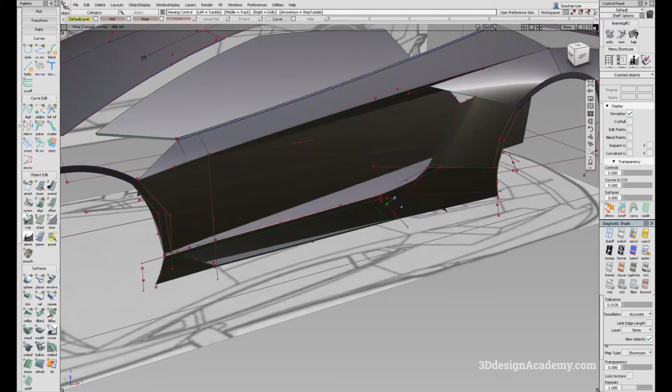In this lesson, we will continue with part 8 of the Lamborghini Aventador project. In the previous lesson, we spent some time working on the door, and we discovered a problem, and that is this highlight over here. This is supposed to appear as just one panel, but because of this little flick in the highlight, I think it's going to cause a lot of problems.

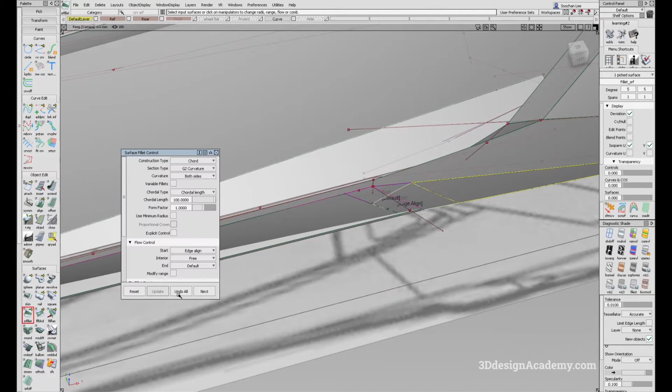First of all, let me just undo this, because this is no longer valid. Let me just delete this one as well, delete the surface over here. Since it looks like this surface is supposed to be just one straight surface, here's what I'm going to do.

I am going to connect the curve. I'm just going to make this a degree 2. I'm going to connect the curve over here like this. Actually, let me copy and paste this one over here.

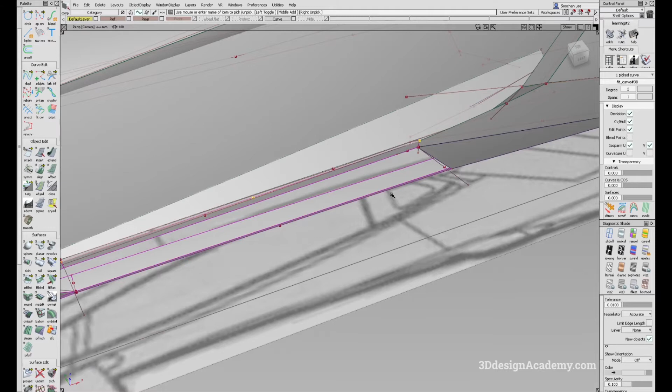So what I'm going to do is copy and paste like this, and extend this curve. The one I copied and pasted is 43, so I'm just going to snap it over here, somewhere over here, and snap this one over here like this.

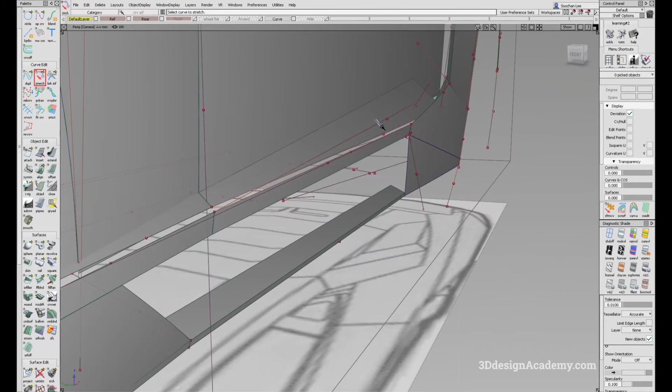The reason why I'm doing this is because right now all the surface has a little bit of crown, so I'm trying to keep that crown, or similar gesture of crown, on the surface as well. Okay, I think that's good.

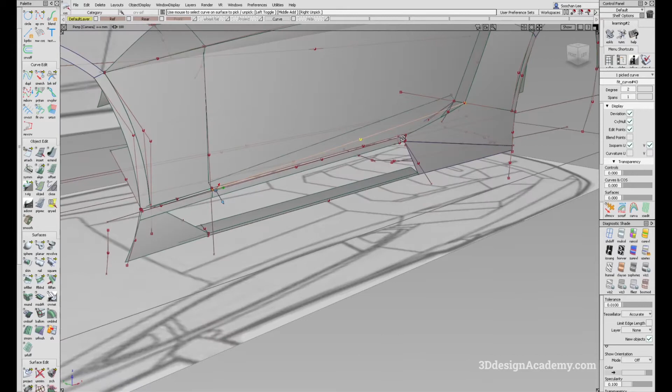The second thing I'm going to do is create a bi-rail based on the surface. Actually, before I do that, I do think that this has a little bit too much

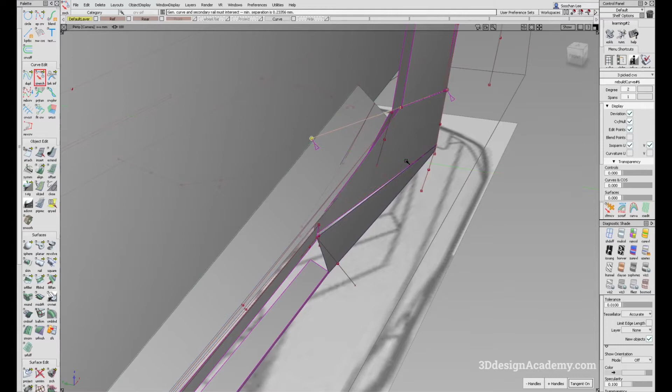twist on the surface. So let me just bring this a little bit more inboard. This is also going to depend on how much - well, I need to pull this out. So let me just pull this in so that there's not too much of a twist over here.

What I'm going to do is realign this curve like this. I'm just going to snap it over here. I don't think it snapped on the right place - no, I don't think it did.

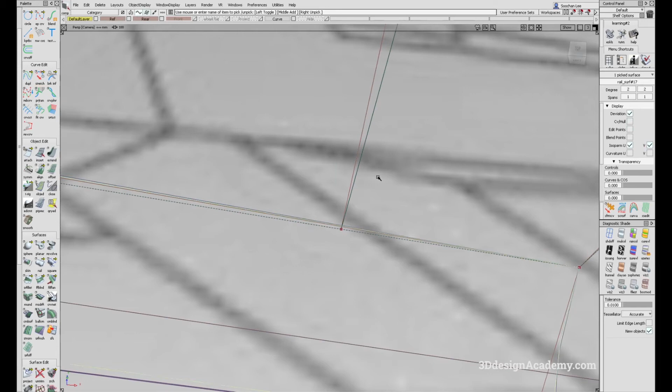So I'm just going to grab this surface, grab this curve. Actually, let me just make sure the draw precision is high. I'm just going to grab this curve over here like that and go to the side view, and just re-snap it like this. That should have fixed the surfaces.

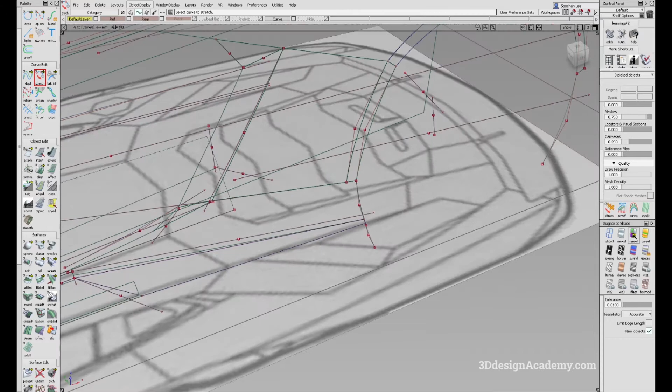Okay, so I think everything looks good. There's a little bit less twist there.

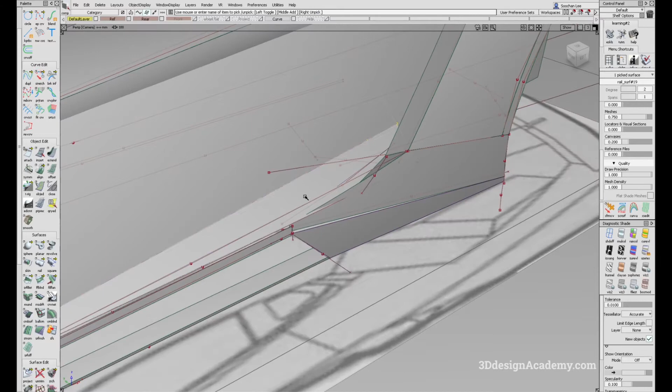What I'm going to do is realign this curve over here to this one right here. Okay, I think that's good, and I'm just going to create a bi-rail based on the surface.

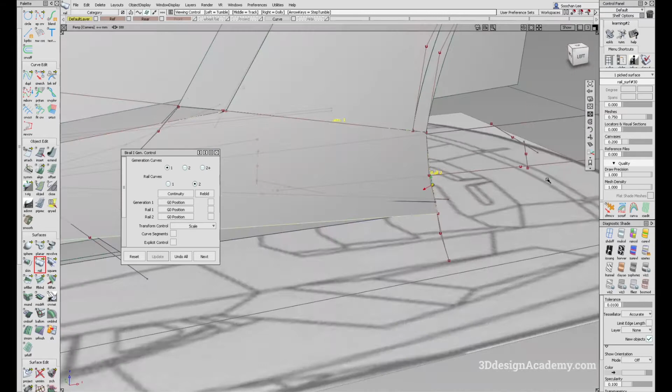Because I pushed this in, this probably also has to be pushed in, but that's okay, I'll do that a little bit later. So I'm just going to do a bi-rail. This is going to be the generation curve, this is rail 1, and the edge we already have is rail 2. Let me check the highlight to make sure it's reasonable. I think it looks good.

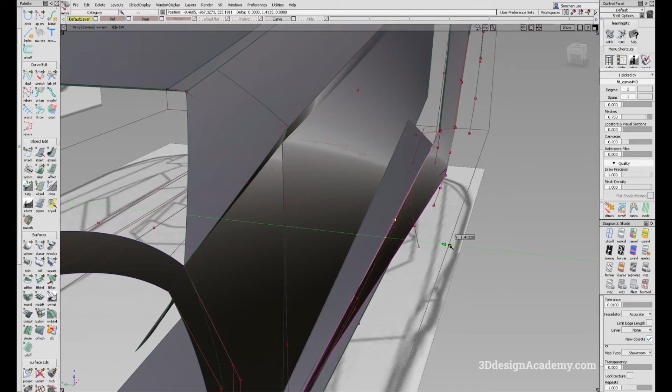There's a little bit of twist over here. I think there might be too much volume there, so I might have to make this a little bit flat. I'm just going to reduce the volume on this a little bit — I think that's causing a problem, making the surface funny over here. Okay, I think that's a little bit better.

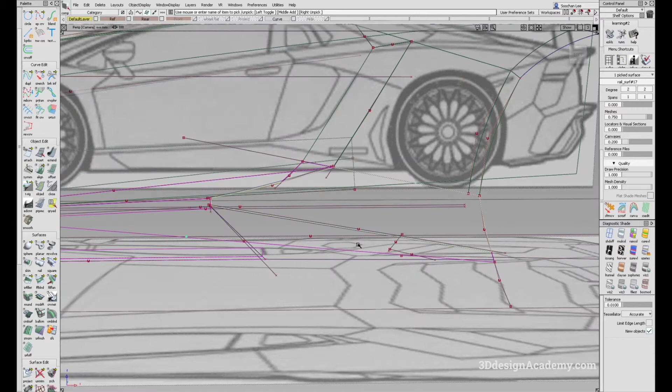There's a surface behind this one, so I'm just going to hide it for a second. Okay, I'm just going to delete this one — that is no longer needed.

I'm just going to look at the surface structure. Highlight looks pretty good, there's a little bit of flick here but I think it's reasonable, and overall the highlight is looking pretty good. Okay, so I'm pretty happy with that.

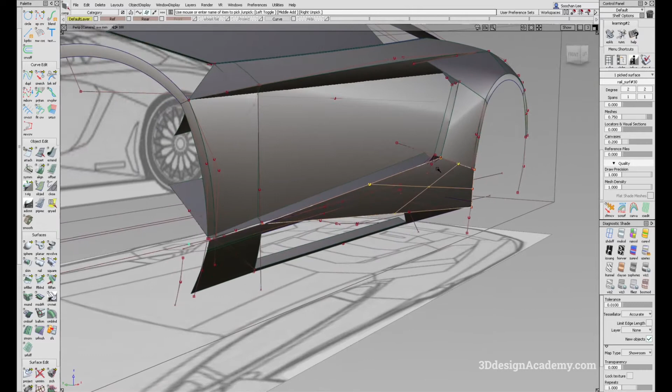So now let's go ahead and trim this surface out. What I'm going to do is grab this edge, and also grab this edge, and let's just trim it out.

Oh, actually, before I trim it out, I do need to extend it down. So I'm just going to extend the surface like this, and I think that's good.

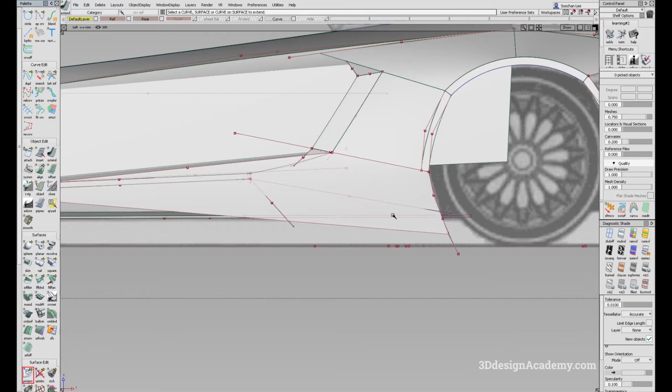Let's also project this bottom line over here like that so we can trim everything. Now we also need to trim this one because it actually needs to connect. Let's see — actually, you know what, I'm just going to trim it using this for now.

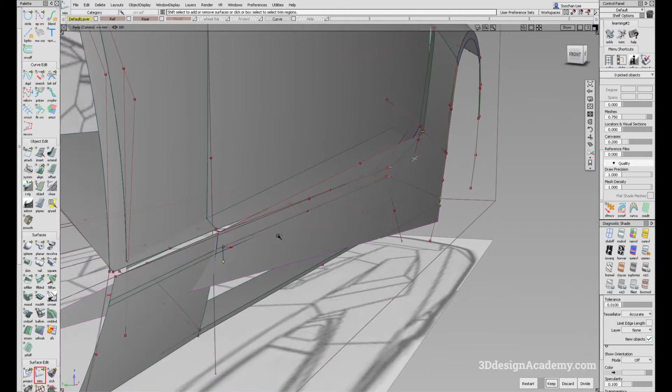Okay, I think that's good enough, let's just trim. Okay, looks like it's not trimming. Oh, we need another projection curve over here. So I'm just going to project that one like this, and here it is.

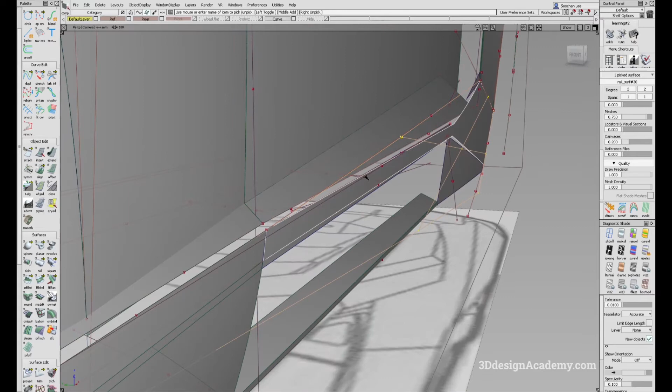Okay, overall I don't think it's too bad. This one needs to actually pop out a little bit, and I probably need to adjust it too, because I made this a little bit flat due to the highlight — I probably need to make a little adjustment.

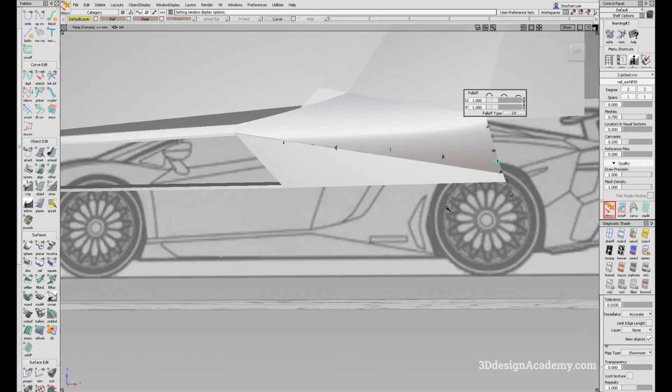But before I do that, I think I'm going to increase the amount of volume on this piece over here. I think it might be too flat, and that's one of the reasons it's causing a little bit of a highlight issue over here. I think that's good.

Let's just take a look — the crease is still there. I think that looks pretty good. Okay, so overall it's not too bad. Now this one I'm going to fix a little bit later, that's the last of my worries.

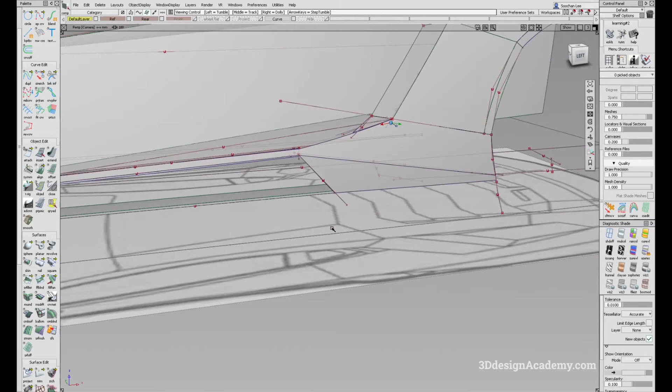So let's go ahead and work on this one. Okay, so this area, actually, this is one of the more critical areas that we need to be aware of.

Now, if you look at the image over here, let me just pull this out — you'll see that everything is just one surface, and you'll start to see a little break over here. So what I'm going to do is create a curve from here to here to trim this out, and I'm going to twist the surface inward so we can get this nice gesture in here.

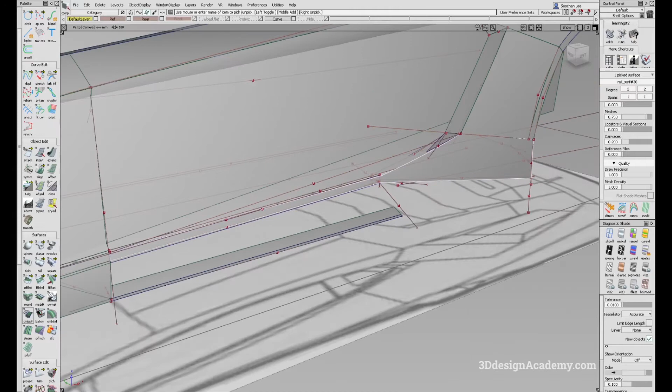So I'm just going to untrim this curve, this surface over here. And this, I believe, was the original location where we need this to intersect. So I'm just going to project this curve over here, and this is where the surface is going to transition inboard.

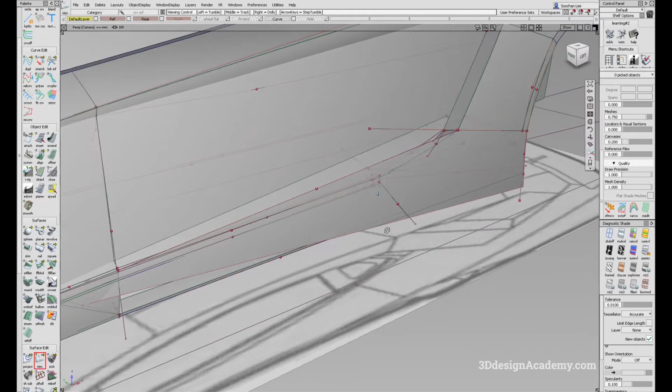Okay, I'm just going to trim this one like this. I think that looks good. Now let's see if it's going to work over here.

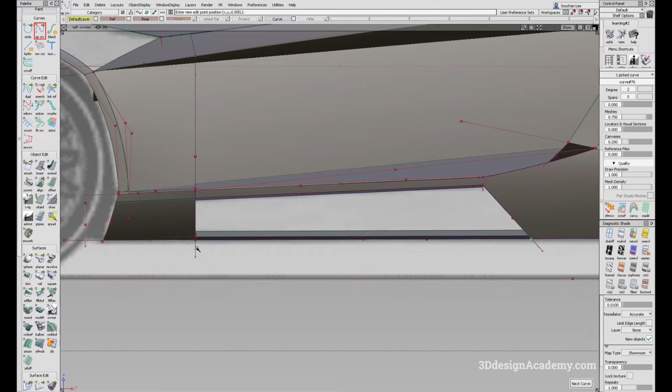So what I'm going to do is just grab a degree 2 curve like this — oh, not a degree 2, a degree 3 curve like this. I'm just going to snap over here, and what I'm going to do is make this into a degree 3.

And because this has to be a nicer transition, it has to be a curvature transition, I'm just going to align this curve over here, and I'm also going to twist this one inward like this.

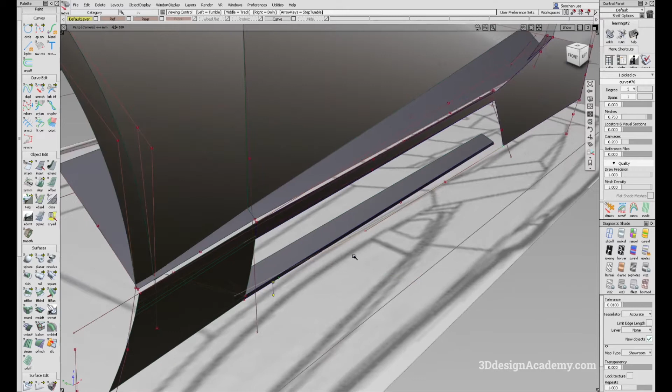So now I'm just going to do a bi-rail. I'm going to pick this one as a gen, this one as a rail, and this one is a rail too. Looks like it's not building, so I'm just going to do a rebuild over here. It's got a lot of spans, but that's okay. I'm more interested in the shape.

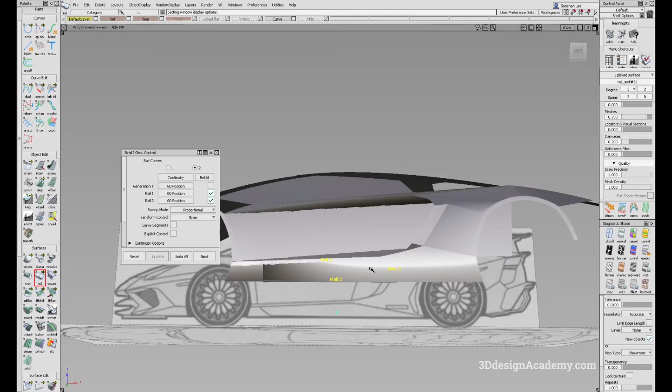Okay, so because of the twist, you'll see the highlights going straight and it's lifting up, but that's okay. And if you see this image over here, I think this is also doing the same thing. So I think this is actually pretty good.

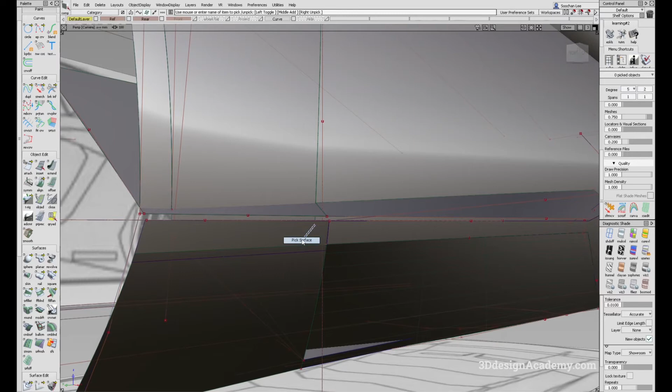And because of the division over here, what is this surface? Oh, this we no longer need, so I'm just going to get rid of that. And I probably need to redo this one as well. I think because of the history, this might have got ruined, but that's okay. I'm going to take care of that a little bit later.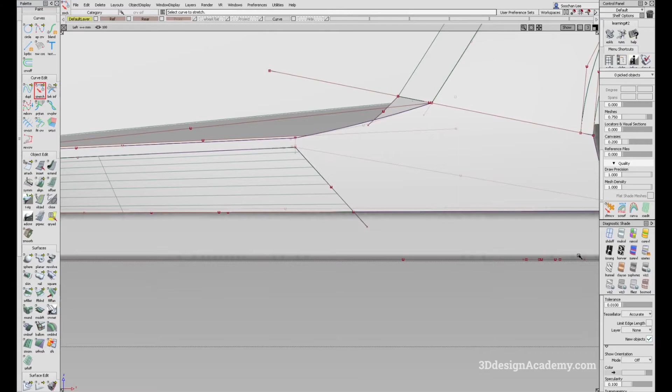Okay, so I think this surface transition inboard is good. However, I do think that this probably needs to be stretched a little bit more rearward. Actually, let me just take a look at the side view. Yeah, I think because it actually disappears somewhere over here, I think I might want to give it a little bit more angle. So let me just go back here, and I would say probably something like this might be better. Okay, so I think that looks good.

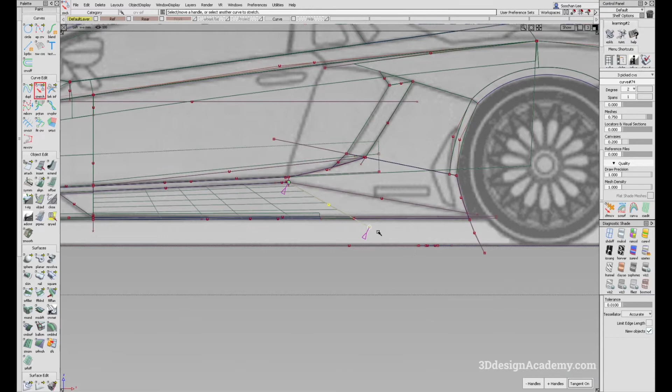Oh, looks like the history might be the reason why it's doing that. Okay, I know it's not doing what I wanted to do, but that's okay. I probably have to just rebuild it.

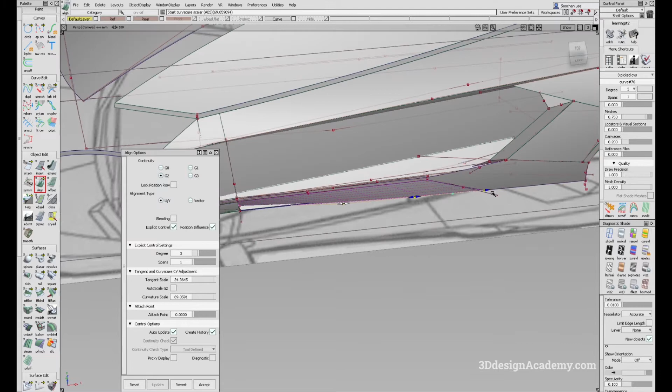And as a result of me pulling this back, if you look at the CV structure, it's a little bit closer here. But I think that's actually okay because I want this transition to go in a little bit earlier. So I'm just going to leave it like that. However, I want to make sure that this is working.

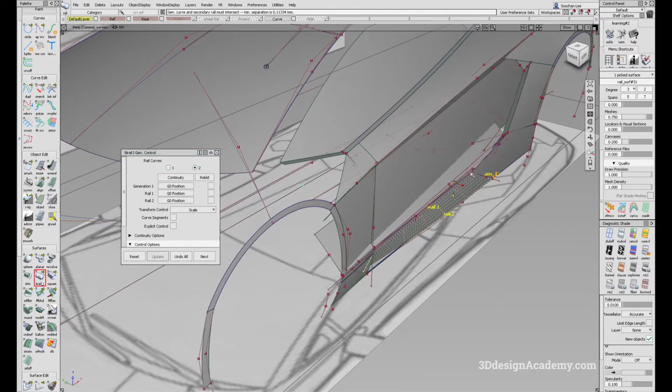So the curve is there, so I don't know why it's not. Well, it could be just a matter of redoing the bi-rail. So I'm just going to click here, here, and here. Let's see, I don't know why it says there's a minimal separation. It could be because of the curve and surface, but I'm not quite sure.

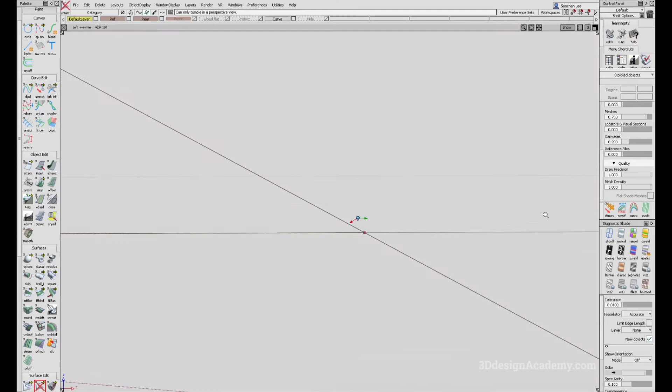So let's just check. Zooming in, I don't think there's a problem, so it just could be a little bit of a bug. I'm not sure, so let me just retrim and let me just redo the bi-rail. 1, 2, and 3.

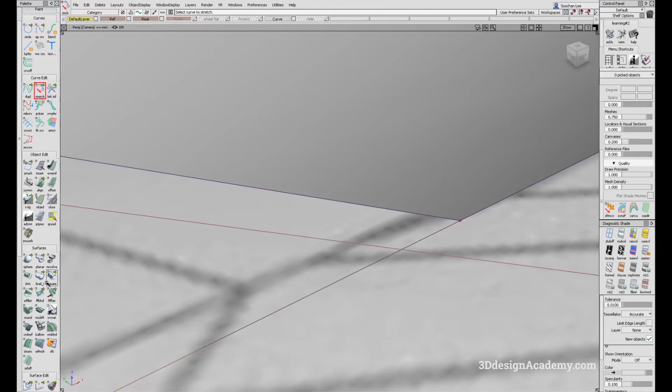Oh okay, so if that's okay, what I'm going to do is just use a stretch tool to snap this one over here, and let me just do bi-rail again and see if that solved it. Oh yes, it did. Well, Alias is not a perfect software as proven here, but that's still okay.

So I'm just going to set this as a curvature, and you'll see that there's a lot of span, so I'm going to try and reduce that. So gen degree needs to be a little bit higher, I think. Okay, so that gives us curvature, and because it needs to be degree 4, I think that looks good.

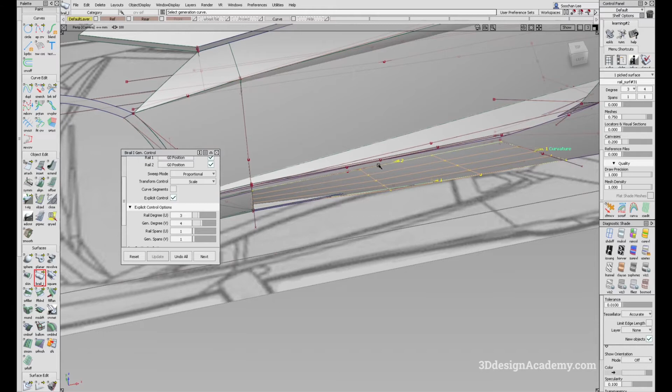Okay, however, I don't like the CV structure here, so I probably have to slide it a little bit. And I think the reason why it's doing that is because this curve is leaning this way, the CV structure is leaning a little bit that way. So I think that's why.

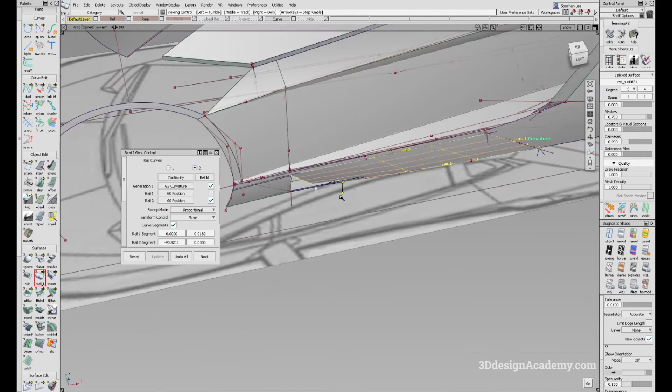And let's see, rail 2 needs... okay, so it looks like rail 2 G0 position, okay, so I think that's pretty good for now. And I'm just going to use a curve segment to pull this a little bit more this way so that the CV structure is a little bit more even. Okay, so I think that looks good.

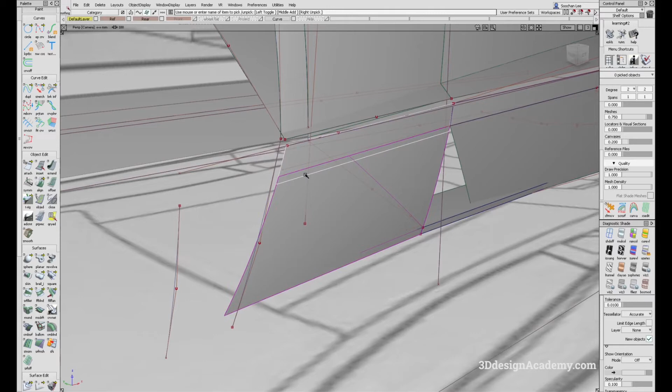So now let's go ahead and redo this one over here. So actually, I think I need to delete this one. Well okay, so this is the gen curve, but the problem is right now this needs to be trimmed off. So I'm just going to delete this one, and I'm going to untrim this one like this.

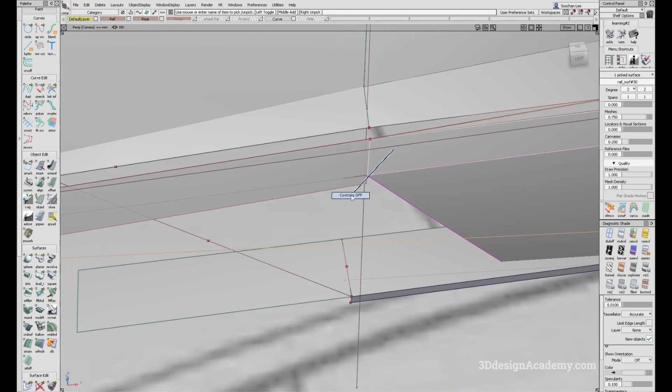And I think this actually needs to be shorter. Okay, so here's what I'm going to do. Right now we have a new section over here, so I have to redo this. So I'm just going to delete this one over here like this, and I'm just going to do a rail again, 1 and 1.

This is going to be the rail, curve segment can be turned off. I'm going to re-snap this one over here, and let's do the rail over here again. Okay, I think that looks good.

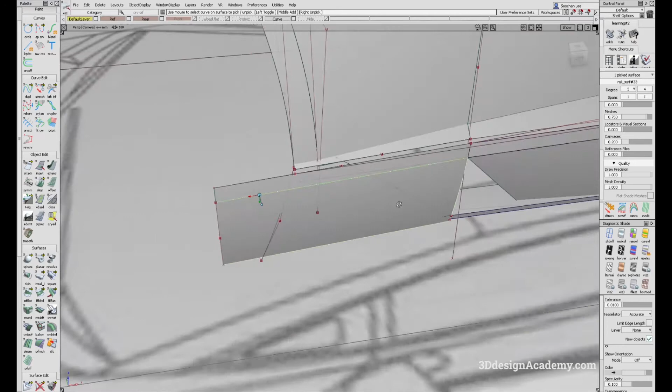Now I'm going to trim this piece over here. I'm just going to use the existing curves. This needs to be projected over here, and I'm just going to trim. Okay, I think that looks good.

And this edge, okay, that needs to be updated. So what I'm going to do is use the stretch tool to snap this one over here. This one needs to be updated as well. Oh, let's go back.

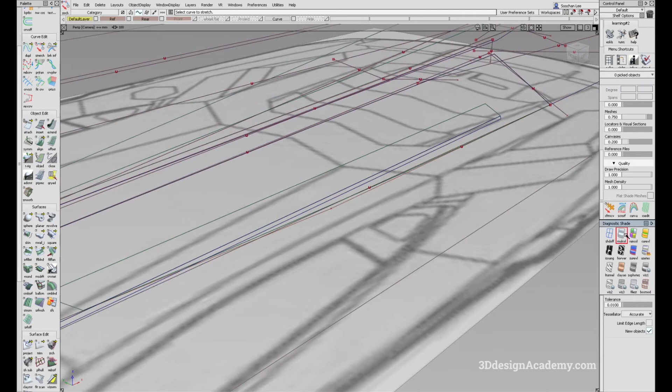So I'm just going to trim this one. That one is fine. I'm going to use this curve, and I'm actually going to stretch it out so that I can snap it over here. So what I'm going to do is snap this curve over here, and I'm just going to snap there.

And looks like it's this curve. Okay, you'll notice that this curve is going out and in and snapping back here. That is not going to give us a result that we want, because if this goes in, then the surface is also going to go in.

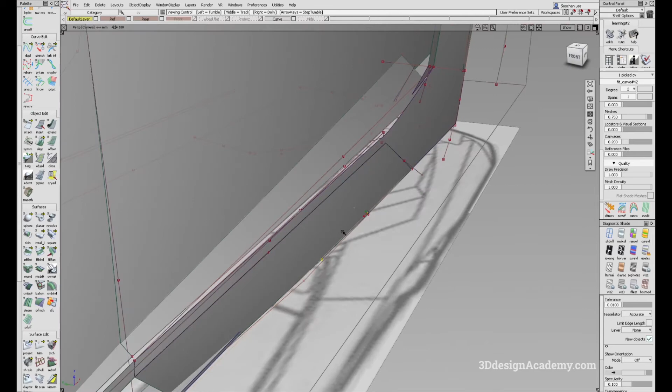So what I need to do is pull this out a little bit like this, and I'm going to redo this surface over here. It's going to be redone like this. Although I should have probably matched that, so let's go ahead and do that.

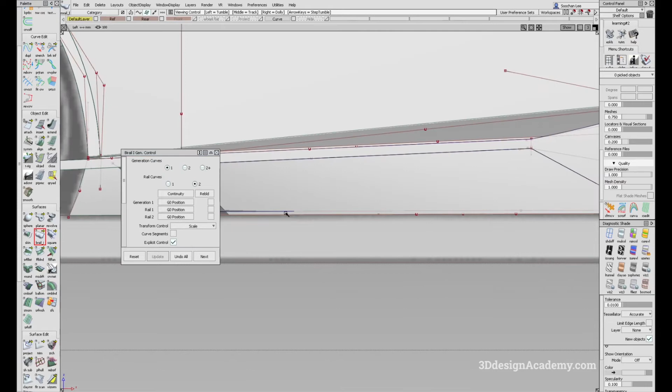So I'm just going to do a bi-rail, it's going to be 1 and 2. Let me just go back to the perspective view like this. And I'm going to do a bi-rail here and here. And this is the other edge that I'm going to do a bi-rail.

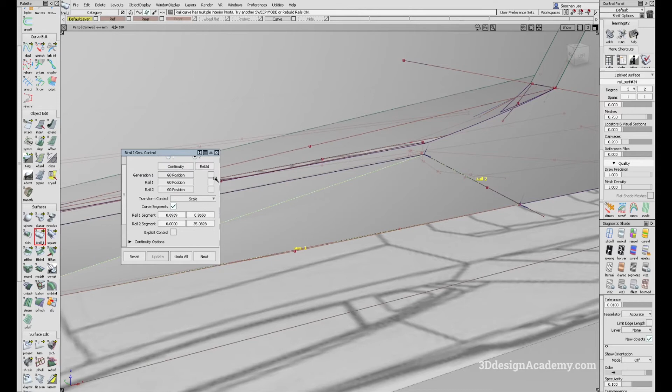Let me just increase the degree. Well, actually, you know what, I don't need to do that. Gen degree should be kept at 2. I'm actually going to turn the explicit control off, and I'm going to just reduce it like this.

And I'm going to just project it. Well, actually, you know what, let's just leave it natural. So I'm just going to use the curve segment. Oh, okay, so it won't allow me to do that. I wanted to match this edge over here, but it's not letting me.

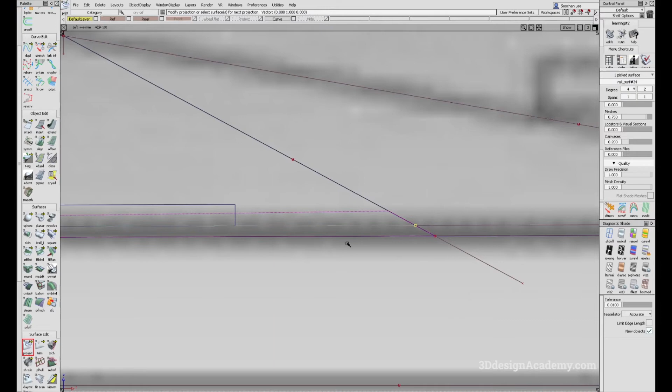So I'm just going to project this curve over here so that the transition over here is nice. And I'm just going to trim this one, and recreate this surface over here. It's just going to be rail 1 and 1.

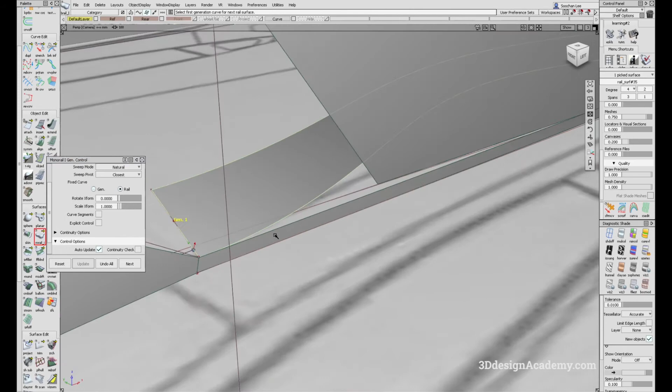I'm going to turn the curve segments off. Okay, looks like there's a little bit of an issue. I don't know what's going on. I think that might be okay. So it looks like the location is a little bit off.

That's okay, let me just snap it back. And looks like this one is a little bit off too, so I can just move this curve. Right now we have history. Where did it go?

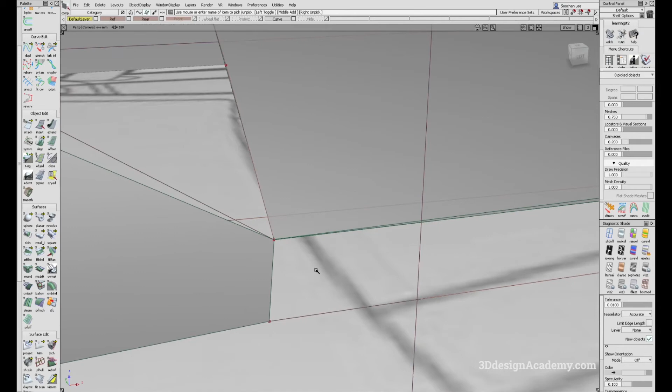Oh, okay, so let me just untrim and retrim. Okay, so that's good. Okay, and I think that looks good.

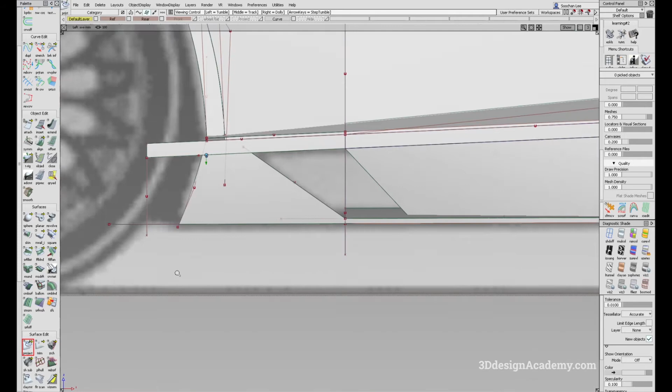All right, let me just reproject this one like this, and I'm going to trim this one. Okay, so far so good. I think that looks much better.

I think I might need to lean this in a little bit more, but that also depends on how everything else looks. So here's what I'm going to do: first, I'm just going to extend this piece over here like this, and make this a degree 2 and whatever history.

Oops, not that one. I'm going to just align this one to this surface. It's going to be edge G2, position influence to max. And I'm also going to make sure that we reduce the span on this one.

So I'm going to say explicit control on, and rail degree, gen can be degree 2, but rail degree I'm going to increase to... oh, there we go. We got a nice surface over here. Let me just make sure.

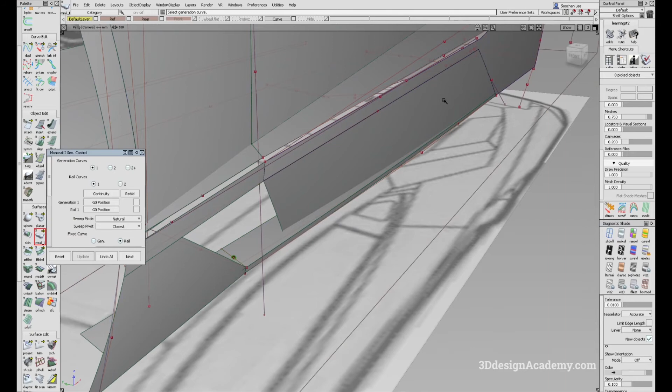I don't like... whenever I have the shade on, it looks like the light, this is a light direction. I don't like that, so I'm just going to turn the lights off like this.

Now let's go ahead and make sure that the offset between this surface and this surface is good. So right now you'll see that there's a little bit of difference between this one and this one because there's a little bend.

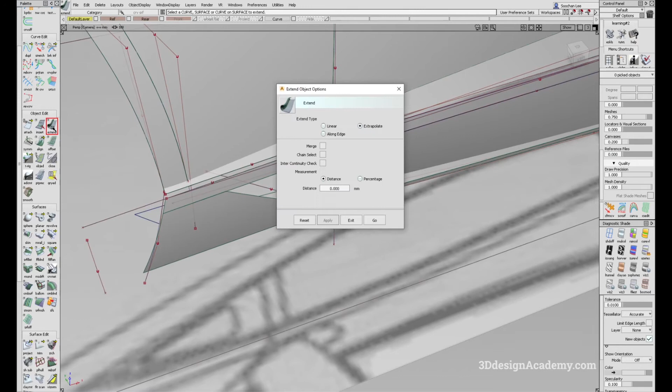So what I'm going to do is extend this piece over here like this. Actually, I'm just going to turn merge back on, and snap it over here. And because, let's see, if you look at this image over here, you'll see that this all needs to match. So what I'm going to do is align this piece.

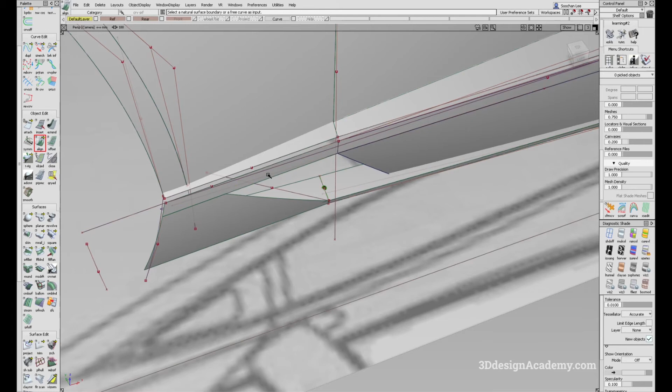Not that edge, I'm going to align this edge. I'm going to align it position, like this, and turn blending on. It's going to be 1, 2, 3, 4, blend factor of 0.

So yes, there is a bend, but it's still going in a little bit. Actually, that does not look good. I think I'm going to have to adjust this one as well, so let me just delete this.

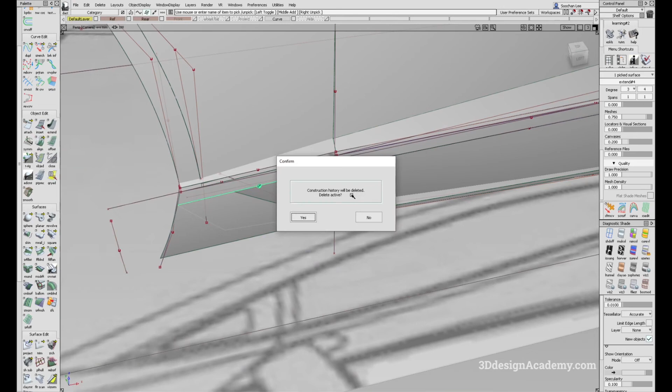I no longer need that. Actually, I'm going to just turn merge on, and I'm going to make this into degree 2, so whatever adjustment I make to this one also translates over here.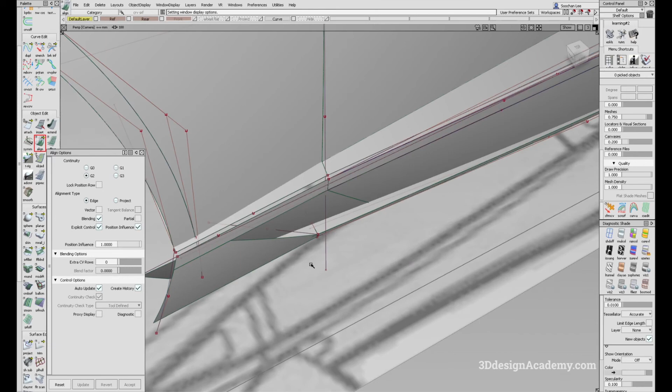I'm going to align this one over here like this, and just look at the distance. It looks like this offset needs to be a little bit bigger. So I'm just going to grab this curve like this, and because this surface is aligned to this one, you'll see it's moving at the same time. And that's good.

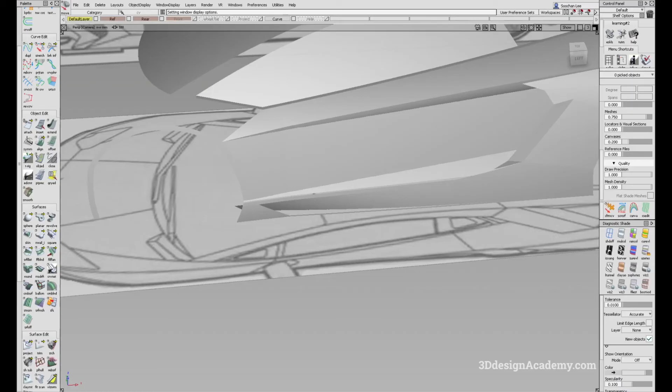I'm just going to push it in like that, and try to mimic whatever we had over here. I think I probably need to push it a little bit more. Let's see, yeah, I might just do a little bit more. I think I'm going to do just a little bit. So I'm just going to grab this curve again, just the end, and push it in. I think that's pretty good.

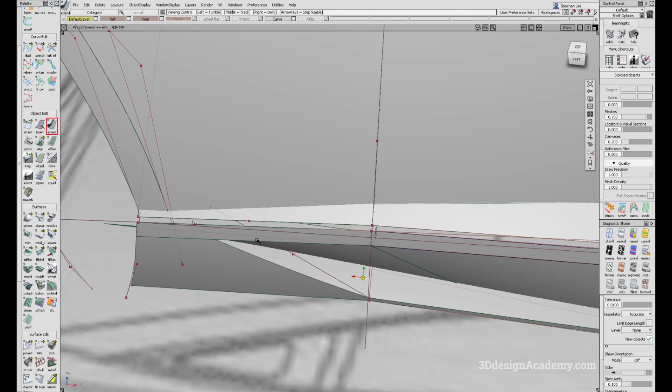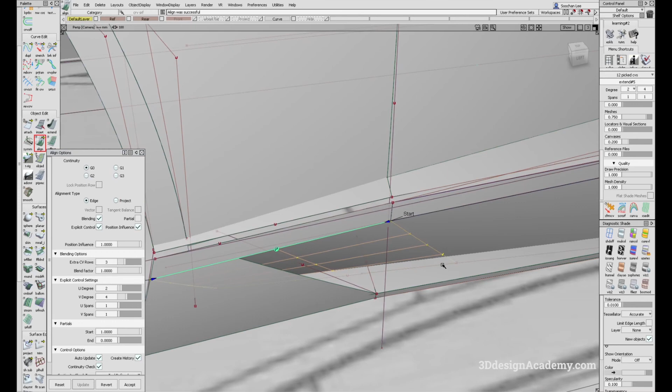Now, because we need to keep this edge somewhat straight, I think I'm just going to first extend this one so that we can cover this up. I'm going to extend this one back over here like this, and align it position on the top because that needs to be aligned. But instead of doing it all the way, I'm going to do a blending, and say 1, 2, 3 and blend factor of 1 so that this line over here is somewhat consistent.

Now there is going to be a break, but I'm also going to give it a fillet, so I think that should be okay. It's going to fillet all the way down from the top to bottom, so that should give it a little bit of balance. Okay, so far so good.

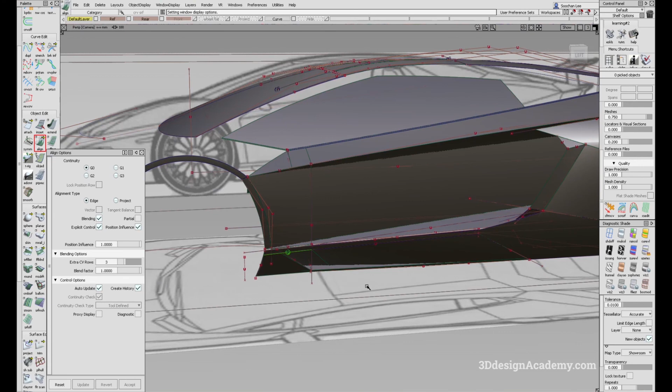I think I was able to make the necessary changes to make sure this works. The highlight is flowing, well, it's not horrible, it's pretty good, but it could have been a little bit better. Much better than before though. I think we were able to get the shape that we want.

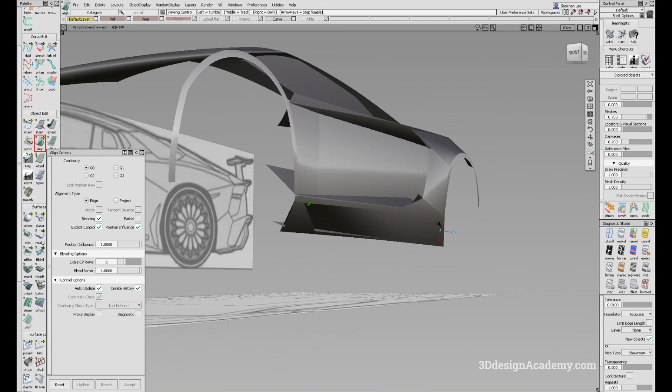If you look at this, it is very similar to this one. We got a break here, blending softly into this one, and we got this feature blend that should be blended eventually to this one. If you look at the shape over here, it's much better than before. Okay, so I'm pretty happy with that.

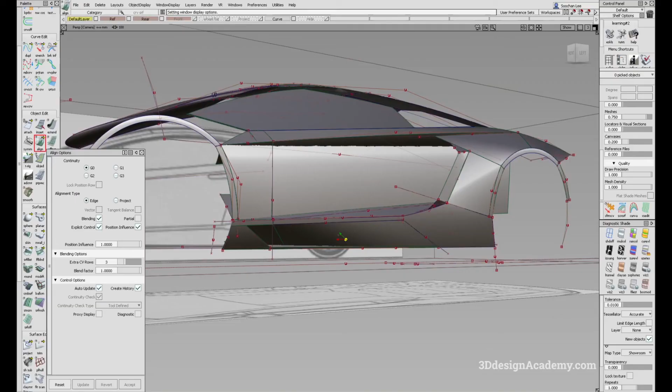I think, although eventually we probably need to do not a surface break, but a panel break. So I'll probably need to just project this line and make it a different surface. I'm going to project this one over here in Y, and this I'm just going to divide like this.

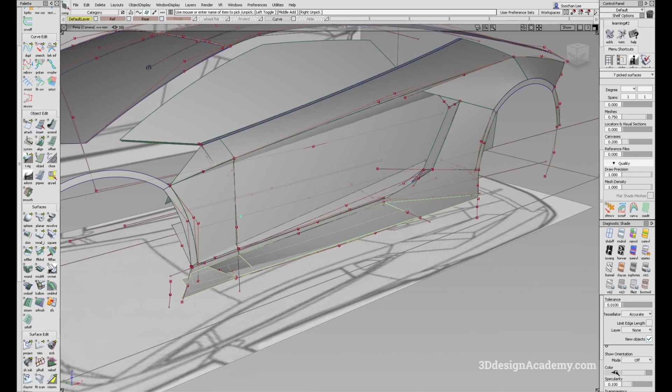And what's going to happen, let's say this is light gray, I'm going to make this a little bit darker gray. Let me just pick this one. Something like this, so now it looks like it's diving down.

Depending on the view, it looks like there's a little break, but as you can see on this panel over here, there actually isn't a physical break between the two. I think it's just the color breakup that's doing that. And if you see this image over here, you'll notice how it's broken. So it looks like it's a different panel, but it's actually just a paint work.

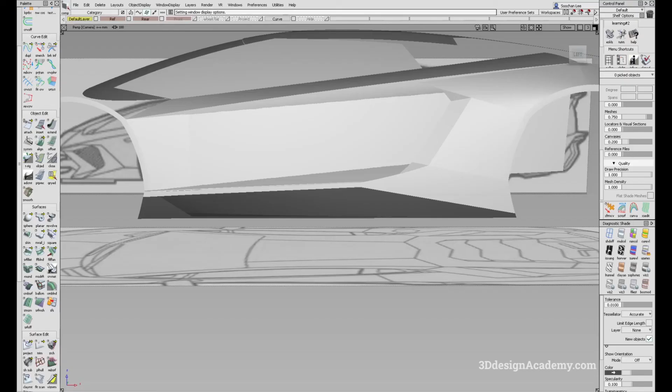This is what I think. Of course, I haven't actually seen the real car, but I think this is pretty close to what it needs to be. Okay, so in the next lesson, I think I'm going to spend some time readjusting all of these surfaces so that it fits. And I think that's what I'm going to do. All right, so that is it for part 8.